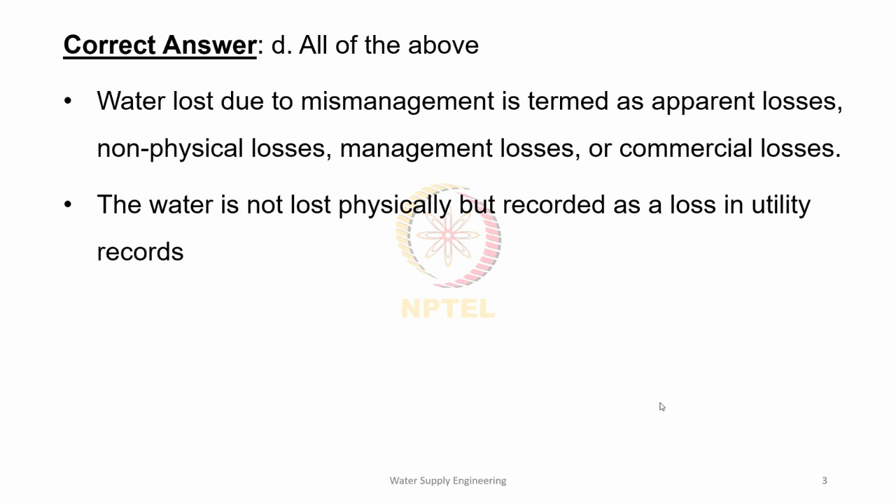Okay, yes. So the answer is all of the above. That is, the water lost due to mismanagement of resources is termed as apparent loss or non physical losses, management loss, or commercial losses. Here, there is no physical loss of water, but that loss is considered as a loss in utility records. It is actually due to mismanagement, but still it is considered as a loss in the utility records. This happens mainly due to recording or data handling errors, sometimes metering inaccuracy, theft of water, or other unauthorized consumption. All these can lead to apparent or non-physical losses.

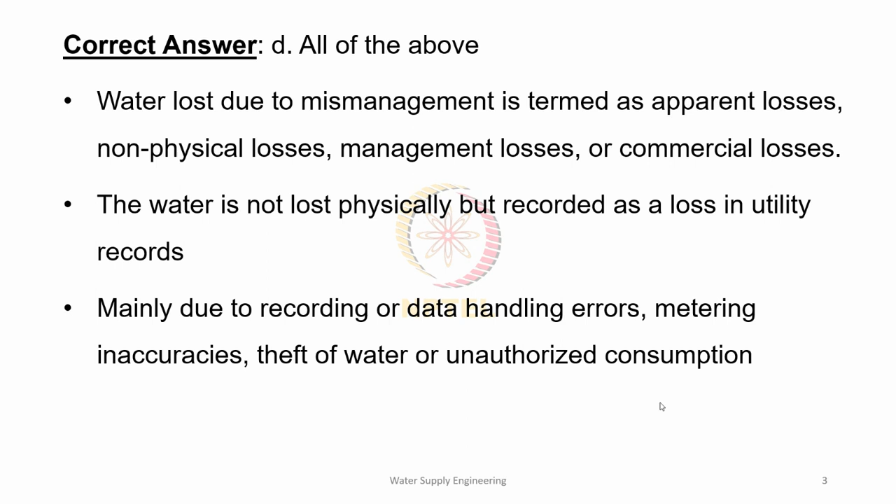Moving on to the next question. Question number two. Seepage through reservoir or tank walls and overflow due to float valve failure are accounted for as option A, real losses or physical losses, option B, management losses, option C, commercial losses, and option D, none of the above. So the seepage through a reservoir or tank walls or overflow due to float valves, which type of losses are these?

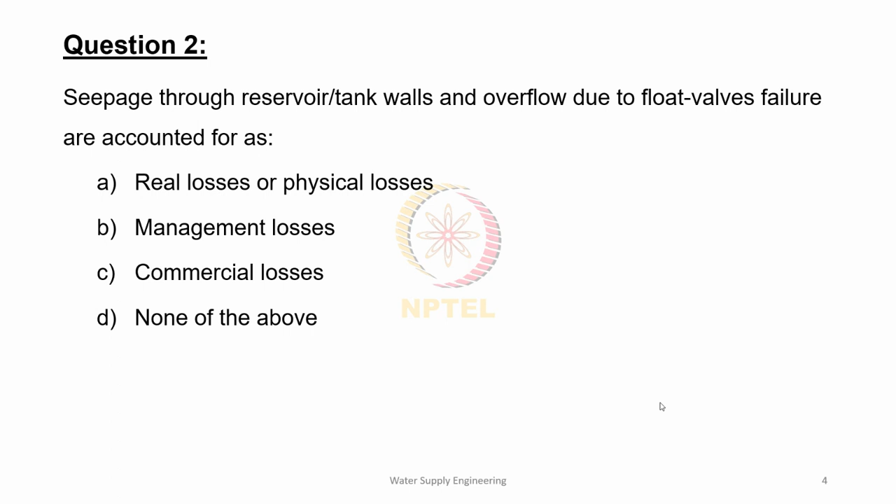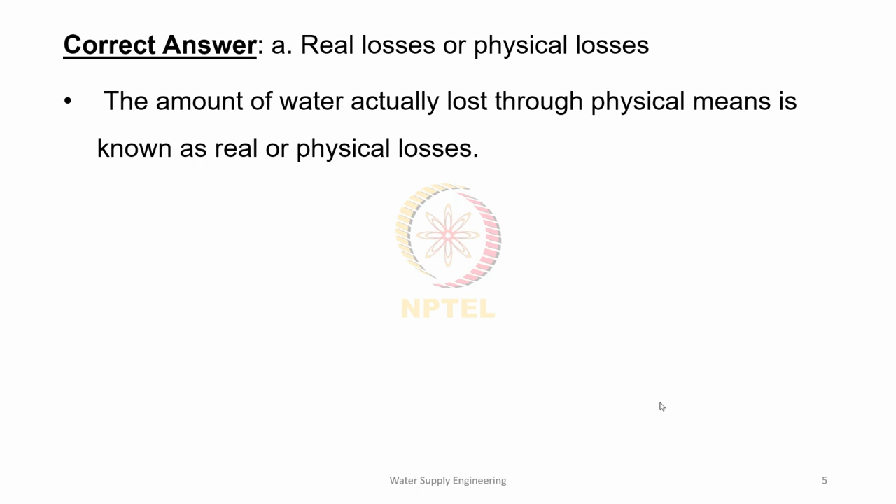Yes, so it's option A, real losses or physical losses. The amount of water that is physically lost is termed as physical loss or real loss. This mainly happens through leakage or overflow. For example, leakage in the pipe, in the joint, fittings, connections, or a seepage loss through the reservoir or tank wall. Also, overflow due to valves. All these contribute to real loss or physical loss of water.

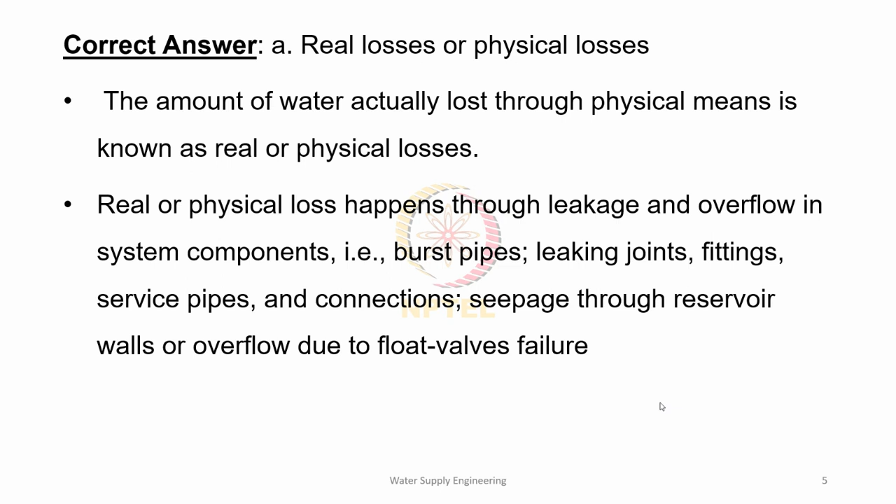So, the major factors that influence the real loss are: first, the percentage of time in a year during which the pipe or system is pressurized. Another factor is, when the system is pressurized, what is the average operating pressure? Third is the total number of connections as well as customer meter or consumer meter locations. Then the number of joints, valves, gauges, and other appurtenances, etc. And the length of the mains, that is the length of the main pipes, and infrastructure condition, basically the type of pipe used and how old that pipe is.

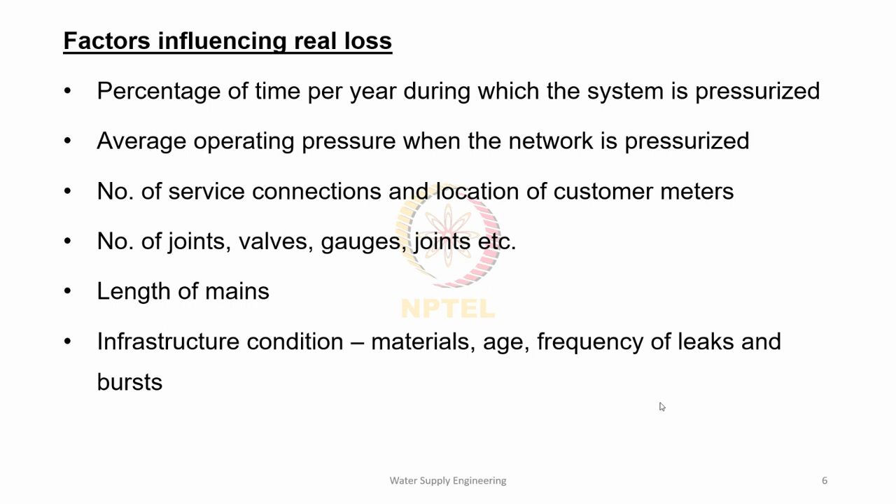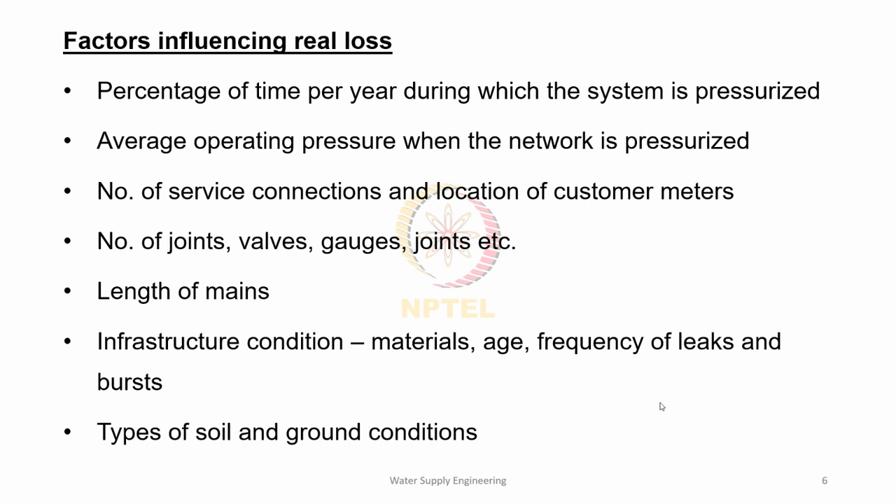Depending upon that, there can be corrosion happening, or deposits along the pipeline. So the age matters, also the frequency of leaks and bursts, and the last factor is the type of soil and ground conditions. All these factors contribute to and influence the real loss.

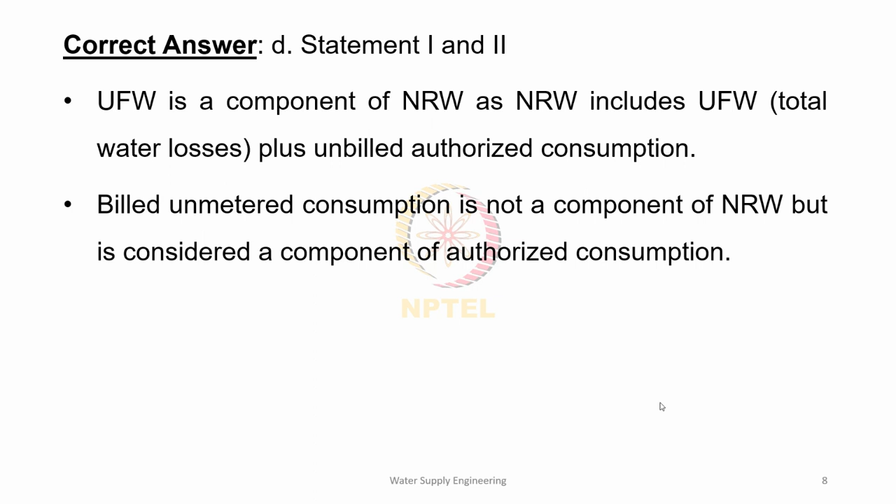Statement 2 is correct. Now, ILI of a utility cannot be estimated from UFW and NRW, but it depends upon pipe length, average operating pressure, as well as the physical losses in the system.

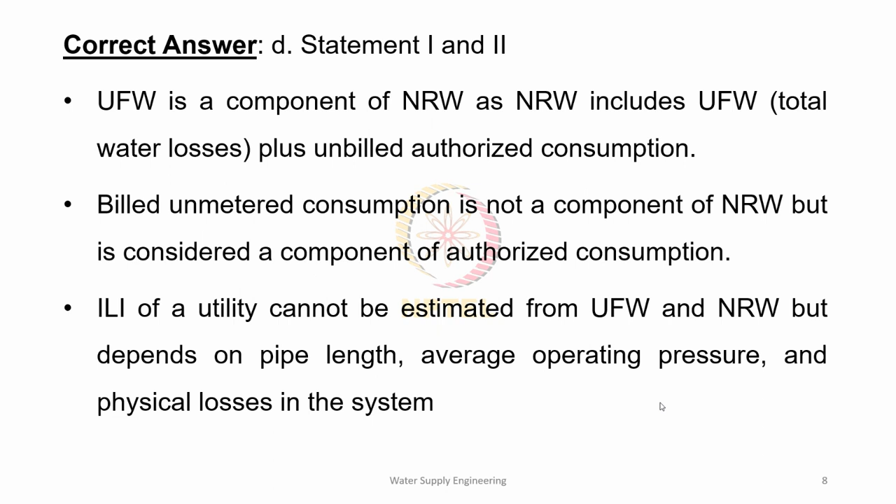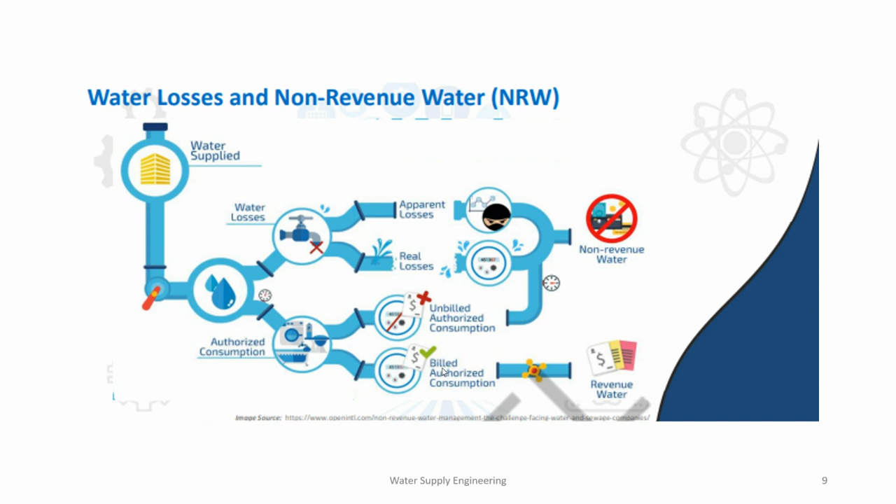So non-revenue water, or NRW, is thus the volume of water for which there is no revenue generation. It can be either the loss or it can be unbilled authorized consumption. So it is the system input volume minus billed authorized consumption that constitutes NRW.

UFW, or unaccounted for water, on the other hand, is the difference between net production and legitimate consumption, whether metered or not. So it's equal to system input volume minus authorized consumption. It's actually an estimate of total water loss. It includes real loss as well as apparent loss, that is physical as well as non-physical losses, included in unaccounted for water.

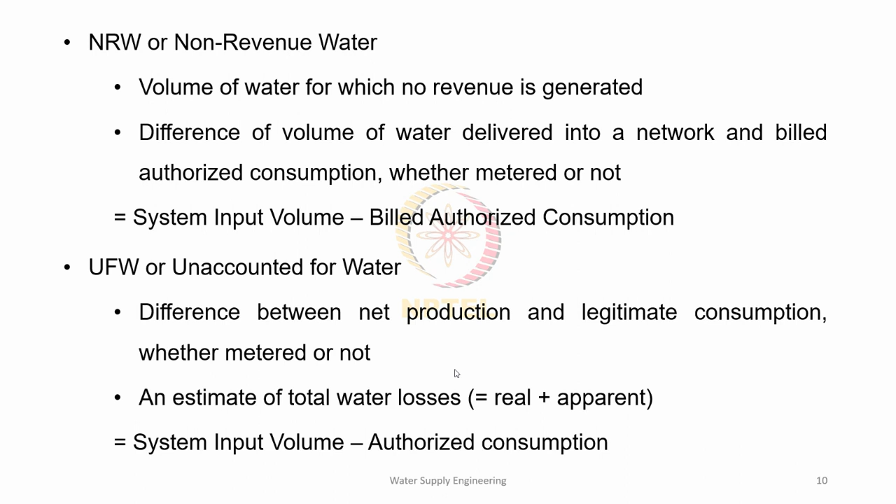So here we can see the water loss indices. UFW is equal to SIV, that is system input volume, minus BAC, billed authorized consumption, minus UAC, that is unbilled authorized consumption. That constitutes real loss plus apparent loss, which together is known as unaccounted for water, UFW.

If we represent this as a percentage, it becomes UFW in percentage is equal to SIV, that is system input volume, minus billed authorized consumption, minus unbilled authorized consumption, the whole divided by system input volume into 100. That is the unaccounted for water expressed in percentage.

Coming to non-revenue water, it is, as we saw, the difference between system input volume and billed authorized consumption. Or it is like the first part from UFW plus UAC. That means it is real loss plus apparent loss plus unbilled authorized consumption. Again, NRW expressed as percentage is given by SIV, that is system input volume, minus billed authorized consumption, the whole divided by system input volume into 100.

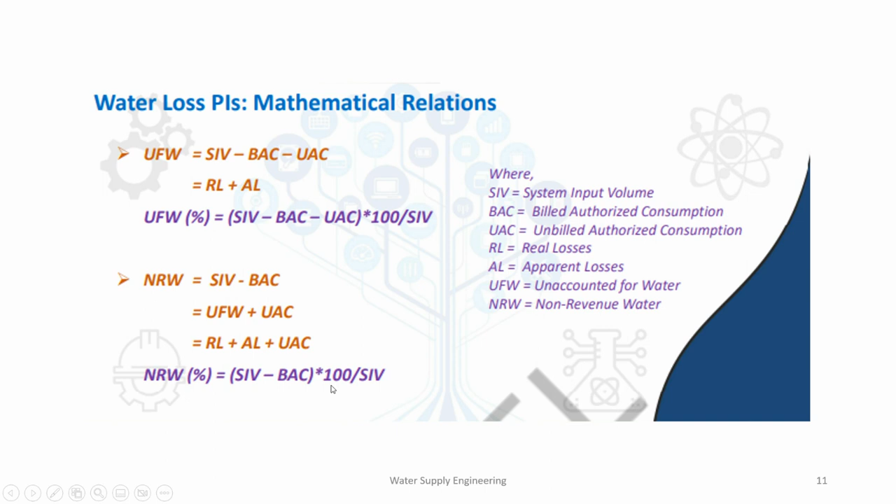Moving on to the next question. The real losses in a water distribution network usually increase with: option A, decrease in the number of consumer or service connections; option B, decrease in the number of joints, valves, and gauges; option C, increase in the average operating pressure of the system; option D, all of the above. So with what does the real loss actually increase?

You can type in your answers in the chat box.

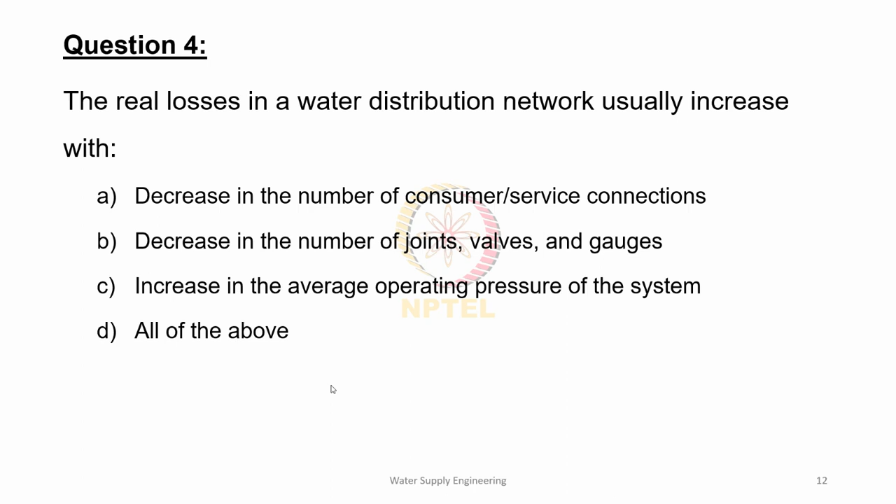Okay, so the correct option is option C, increase in the average operating pressure of the system. The real losses in a water distribution network usually increase with increase in the average operating pressure in the network and the duration for which the network is pressurized. Also, it increases with increase in consumer connections, service connections, as well as with increase in number of joints, valves, and other appurtenances, etc.

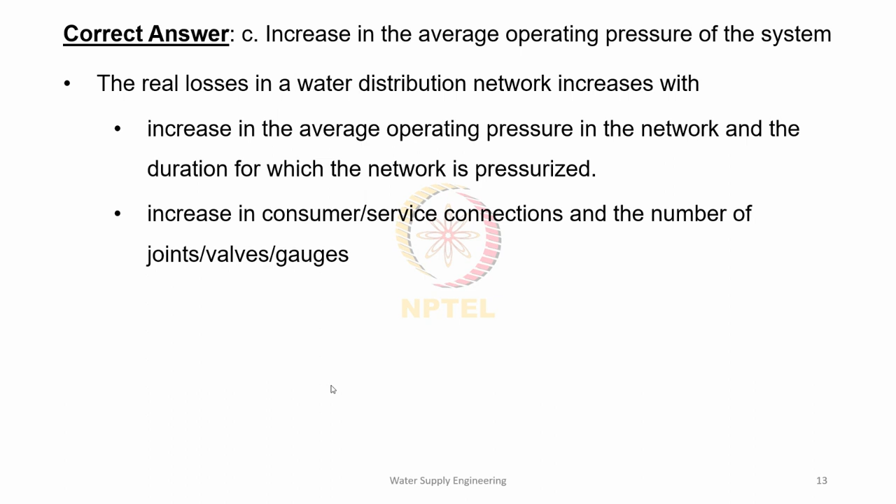Question number 5: unauthorized consumption plus metering and billing inaccuracies in a water distribution network equal to what? Option A, real losses; option B, non-revenue water; option C, unaccounted for water; option D, apparent loss. So just now we saw the definition for all these. So what is unauthorized consumption plus metering and billing inaccuracy?

Is it real loss, non-revenue water, unaccounted for water, or apparent loss?

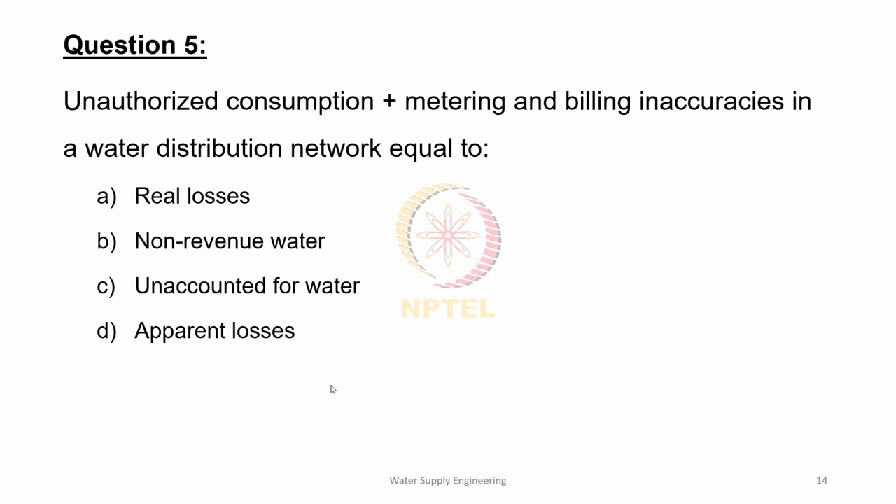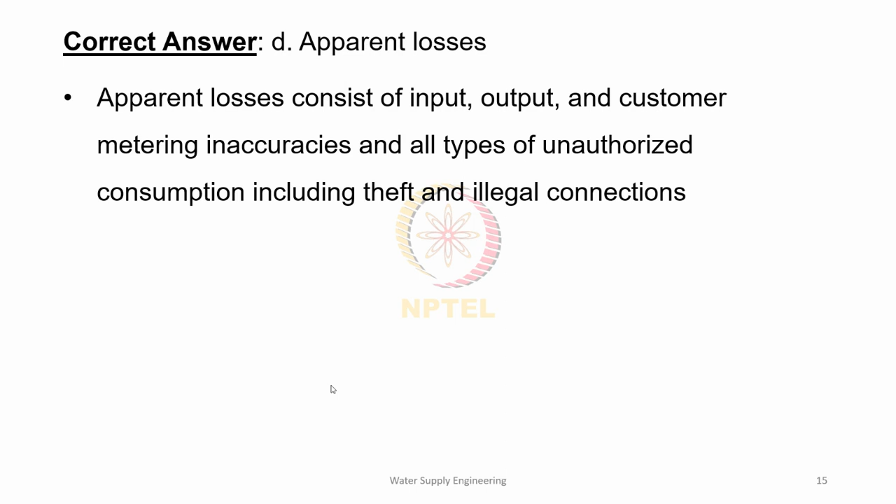Okay, the correct answer is option D, apparent losses. As we saw earlier, apparent losses consist of input, output, and customer metering inaccuracy. All the mismanagement and losses due to mismanagement come under apparent losses, and all types of unauthorized consumption, including theft and illegal connections, come under apparent losses.

So now question number 6: the core component of non-revenue water is option A, unbilled authorized consumption; option B, real losses; option C, apparent losses; option D, all of the above. So which is the core component of non-revenue water?

Okay, so the correct answer is all of the above. That is, non-revenue water is equal to unbilled authorized consumption plus real losses plus apparent losses, as we saw in the earlier slide.

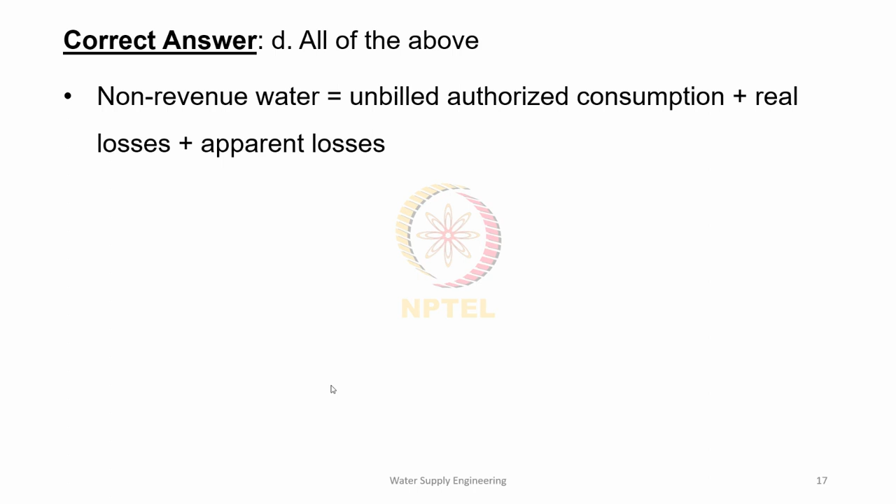Question number 7. Which of these methods can assess the volume of leakage in a water distribution network without pinpointing its location? Option A, ground microphone. Option B, minimum night flow analysis. Option C, tracer gas technique. Option D, none of the above. So, which can assess the leakage without pinpointing the location?

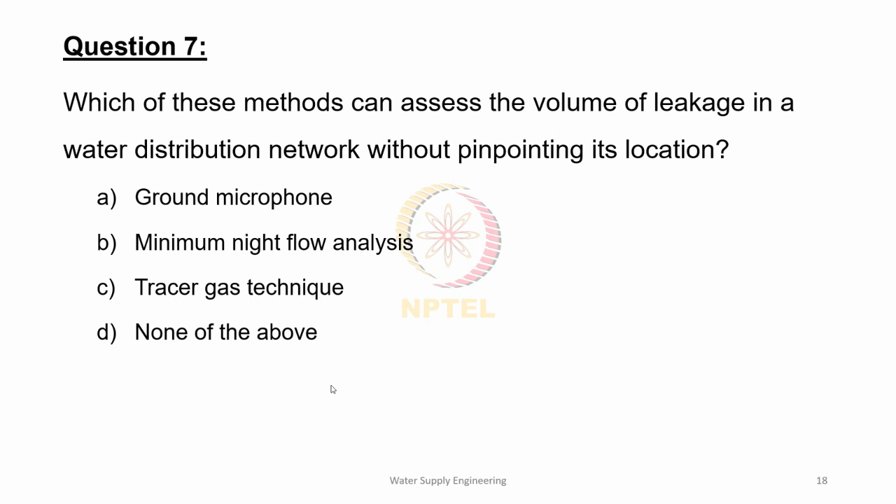Yes, the correct option is option B, minimum night flow analysis. So, minimum night flow is the lowest flow into a DMA over a 24-hour period. Normally, that occurs between 2 to 4 a.m. when most users don't use water. So, this is a minimum flow time, usually in the early morning because most consumers are not using water during that time.

So the water flow during this time is actually considered predominantly leaks, and that helps in estimating real loss. But whatever night flow happens in that time interval is considered as leaks or leakages. We don't know whether it is really a leakage or whether someone is using it. And another problem is that it will not pinpoint the location where the leakage is happening; it just gives an estimation of the value.

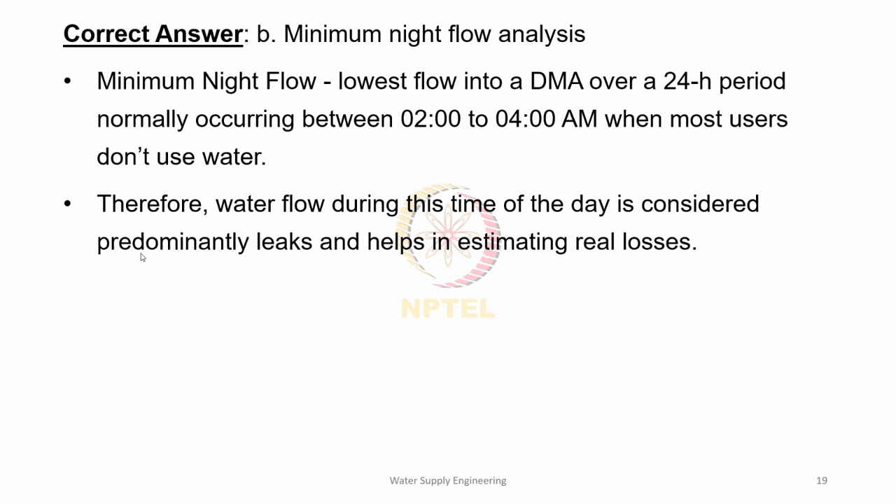So estimation of leakage is equal to minimum night flow minus legitimate night flow. Now what is legitimate night flow? It is roughly calculated as 6% population using 10 liters of water for toilet flush. So that is like some amount of water will be definitely used by some people here or there. To take into account that consumption, estimation of leakage through minimum night flow is done as minimum night flow minus legitimate night flow, assuming that 6% population will roughly use 10 liters of water for toilet flushing.

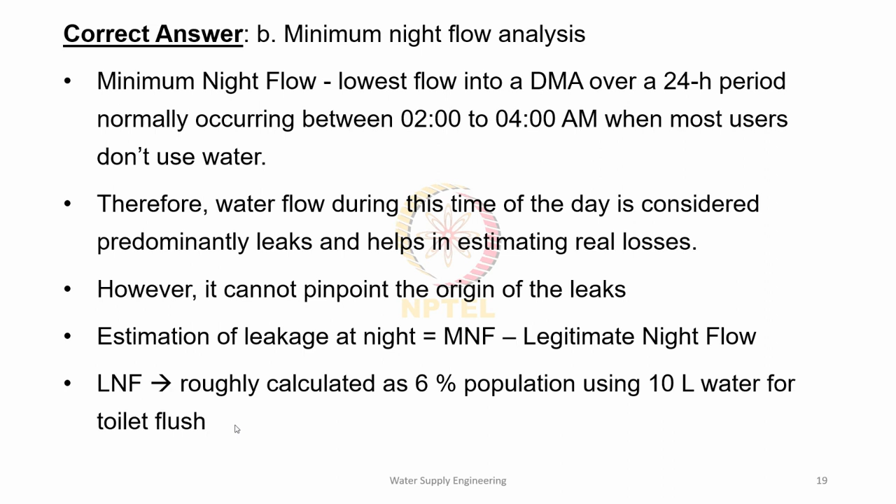Okay, question number 8. Which of the following statements concerning acoustic methods of leak detection is or are true? Option A, the efficacy of leak noise loggers in pinpointing exact leak locations can be increased by using them in combination with correlators. Option B, the leak noise correlator pinpoints the leak location using only the distance between the two sensors. Option C, both A and B. Option D, none of the above. So, which statement is true?

So, it's option A, B, or both A and B, or none of them.

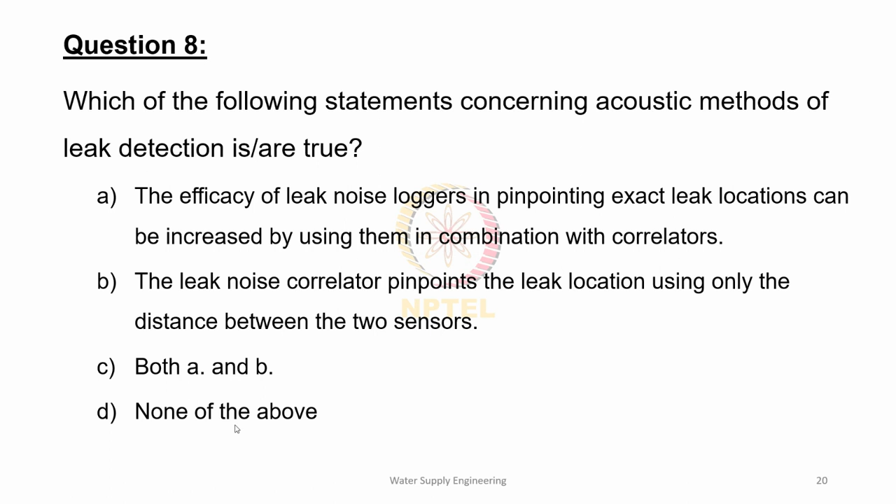Okay, so the correct answer is option A. That is, the efficacy of leak noise loggers in pinpointing exact leak locations can be increased by using them in combination with correlators. So that's a true statement. Leak noise loggers can identify leaks immediately as they occur but do not identify the exact location without the use of a correlator. Only if we use them combined with a correlator can we get an exact location pinpointed.

So the leak location from the sensor is given as d minus c delta t by 2, where d is the distance between sensors, c is the propagation velocity of sound, and delta t is the time lag corresponding to difference in arrival times of leak signals.

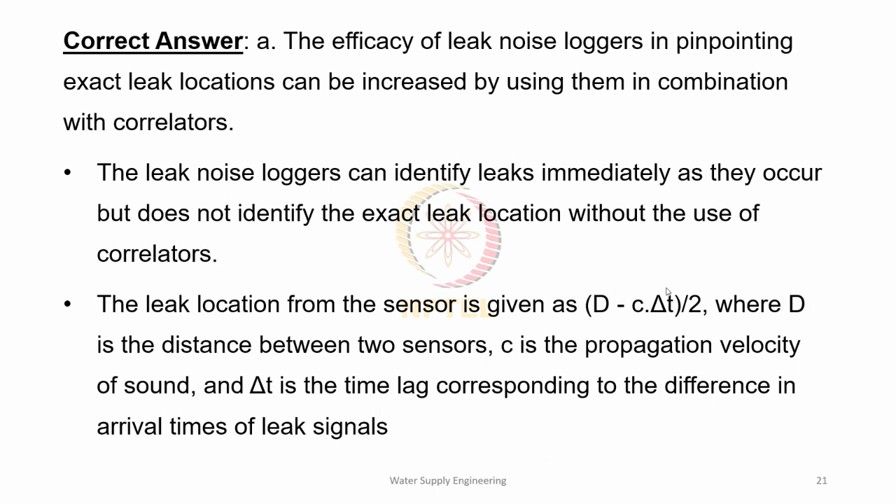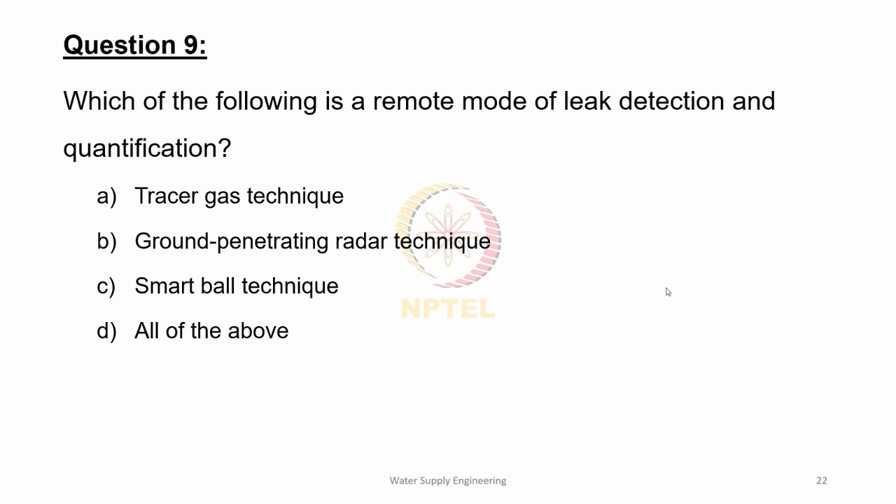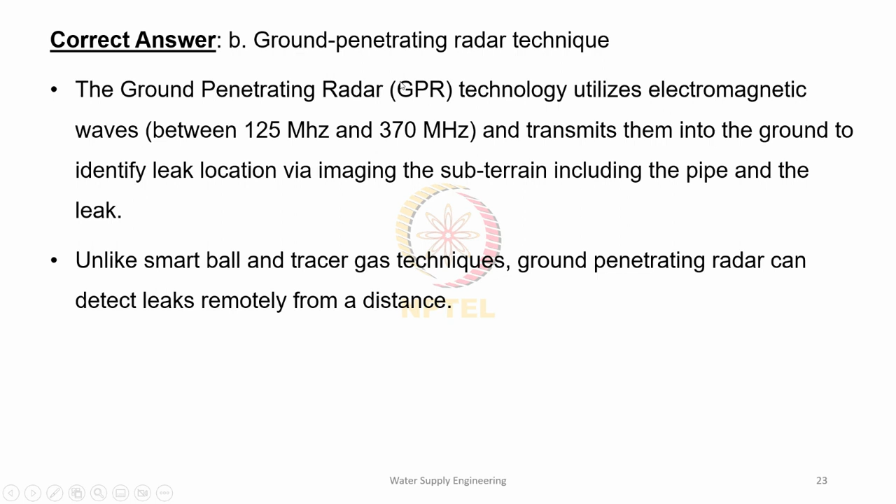Yes, correct answer is option B, ground penetrating radar technique. The ground penetrating radar technology, or GPR technology, utilizes electromagnetic waves that lie between 125 and 370 megahertz. They transmit these electromagnetic waves into the ground to identify the leak location using imaging of the subterranean, including the pipe and leak. So it's a remote method. Unlike options A and C, where the smart ball and tracer gas techniques are used, ground penetrating radar can operate remotely from a distance.

So, we'll see what are the details of water loss detection. Leakage or loss detection is actually a critical parameter when we come to water distribution networks, because if there is more unauthorized consumption, more theft of water, or leakages happening, it results in a huge loss of water, or a good percentage of water from the supplied water. And if leakages happen, it can cause problems in the normal distribution of water, as well as water logging issues wherever the leakage is happening. So leak detection is a critical parameter.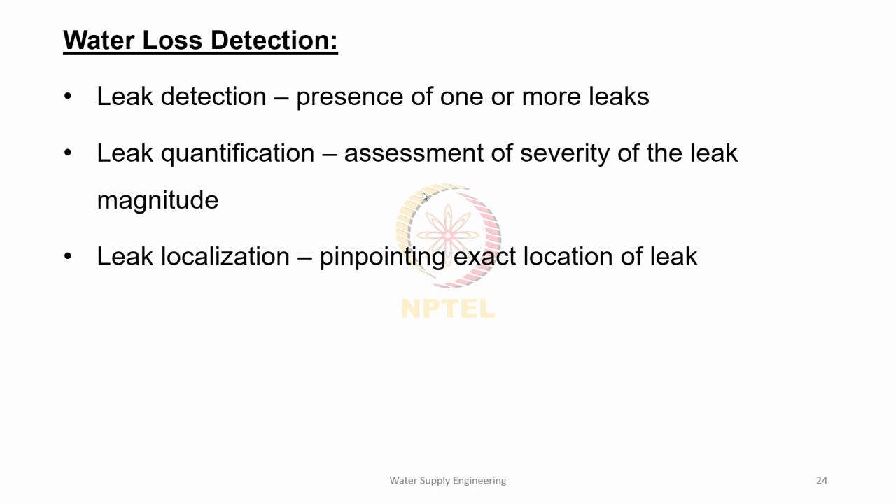So the process is like, first we need to detect the leak, then we need to quantify it, and then we need to pinpoint the location. That is leak detection, leak quantification, and leak localization. In leak detection, the presence of one or more leaks is identified. In leak quantification, the severity and magnitude are assessed. And in leak localization, the exact location of the leak is identified. So the process is first detect, then quantify, and then localize.

So these are the different leak detection methods according to Zaman et al. that are available now. There are direct methods as well as indirect methods. In direct methods, we have hardware based methods, visual inspection, and pipe sampling. In the hardware based methods, it's like robotic devices or out-of-pipe devices. These are new technologies that have come in. The most obsolete method among direct, indirect, and inferential methods is the inferential method, where we do soil monitoring, soil LPR, or pipe-soil potential surveys.

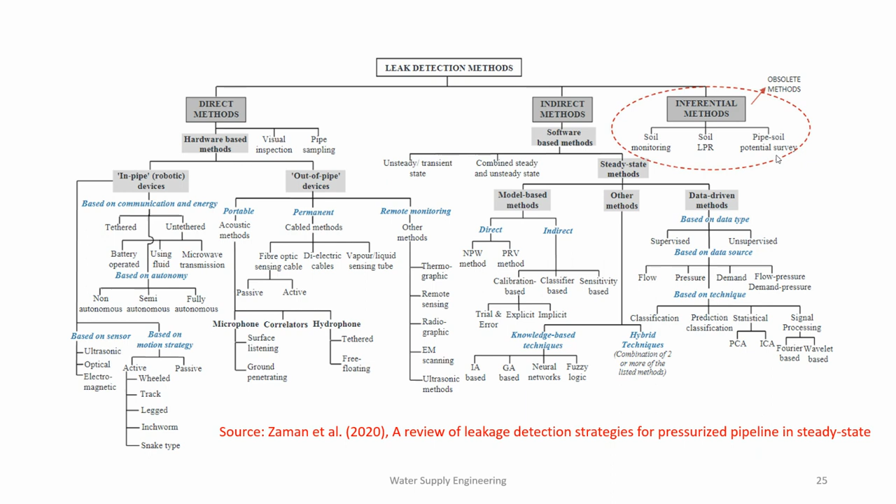So we'll see some of these methods in detail. The first one is minimum night flow analysis that we saw earlier. As we saw, it is the lowest flow happening over a 24-hour period, during 2 a.m. to 4 a.m. The assumption is that during that time period the flow is mostly due to leakages, and if some consumption is happening, that is considered legitimate night flow, which is subtracted from minimum night flow to obtain the leakage value. That is, real loss is equal to minimum night flow minus legitimate night flow.

So the estimation through this method is usually not valid because it usually overestimates for the daytime, as the average operating pressure during day is less. According to Lambert, the pressure-leak relationship is expressed as L1 by L0 is equal to P1 by P0 raised to N, where L represents leakage, P represents pressure, and N represents the leakage component or leakage exponent that varies from 0.5 to 1.5. For a connection with fixed area leakage path, N is 0.5. If the leakage path is variable, we should take N as 1.5.

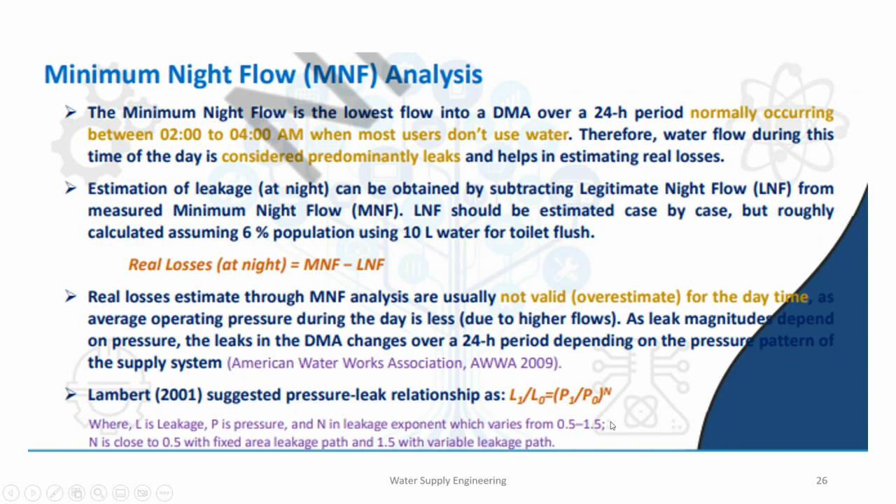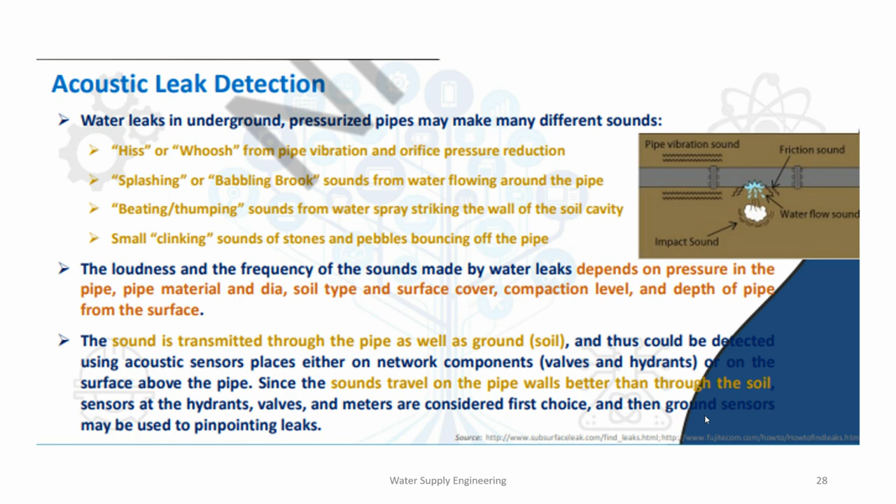So this is what happens there. This can be done either in contact mode or survey mode or both. On fittings, we can do contact mode; between fittings, we can go for survey mode. So with the deflection in the meter, whether it is weak or loud noise that is coming, we will detect the location and leakage quantities.

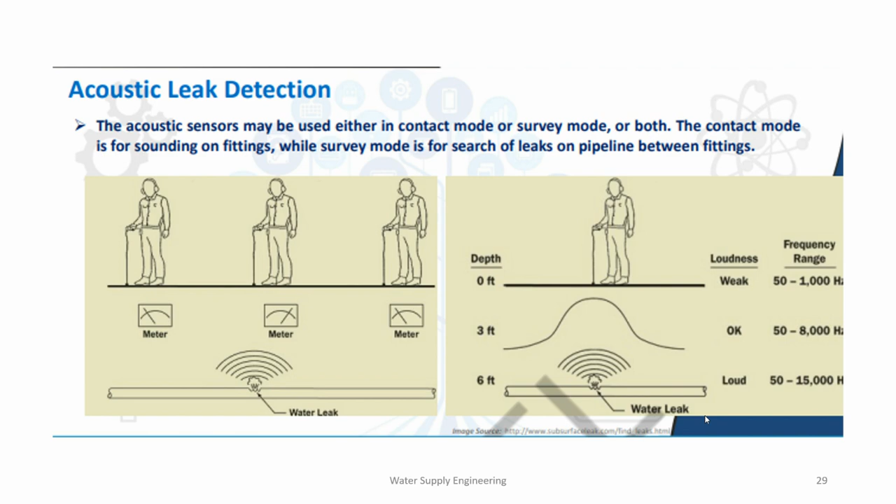The next one is leak noise loggers, that is a microphone plus a logger. That is installed on a group of adjacent fittings. This will be a semi-permanent or permanent monitoring system. They will identify one or more of the fittings, considering the characteristics between similar fittings, and then search on the unique features coming out due to the leakages. But the problem is, again, this cannot pinpoint the location where it has happened, and it has a high initial cost also, because this real-time monitoring system is a bit costly.

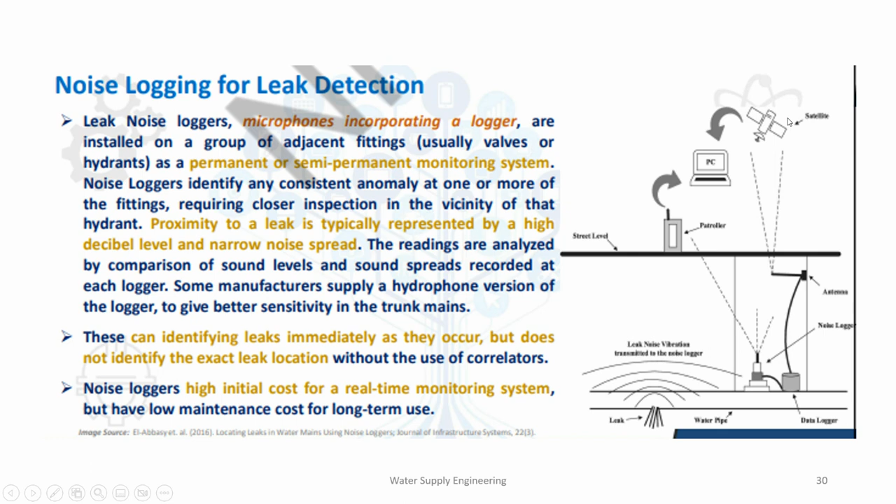The next one is sounding surveys. This is like listening devices are used in order to analyze the sound that is being generated in the appurtenances along the pipe network. These are highly accurate and sensitive. These are carried out using various types of equipment, for example acoustic listening stick, electronic listening stick, ground microphone, leak noise correlators. All these are used for sounding surveys.

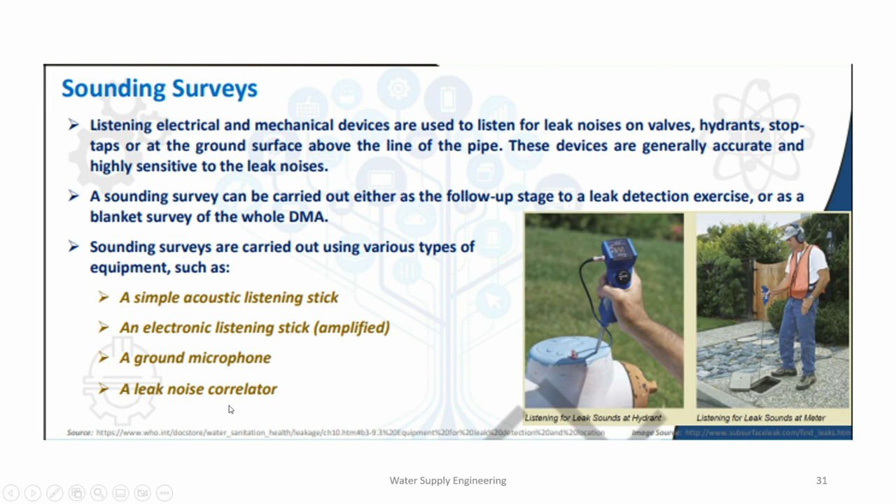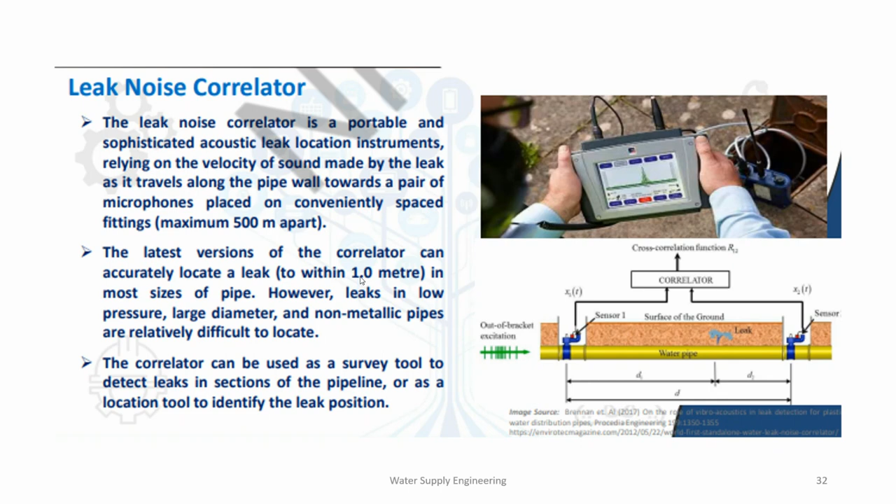Another method is leak positioning. If we have to identify the exact position, the time lag is to be calculated, and that is given by the difference between the arrival times in measured signals. The time lag, as we saw earlier, is L2 minus L1 by C. So from this equation we saw that leak location is equal to D minus C delta T by 2. This will give the leak location or leak positioning, this distance being from the sensor to the leakage point.

The next method is tracer gas injection for leak detection. Here what we do is inject a tracer gas which is inert, non-toxic, and insoluble. We introduce this into the pipe network, for example using a hydrant, and the gas, since it is lighter, will try to escape through the leaks as shown in the picture. This leakage of gas is detected using microsensors, and this is usually used for all types of materials. It can be used for all types of materials, but is usually not used just because of the additional high cost that comes with it. So we do not recommend it for larger pipelines, and the major application is to identify small background leaks or leaks in service pipes, etc.

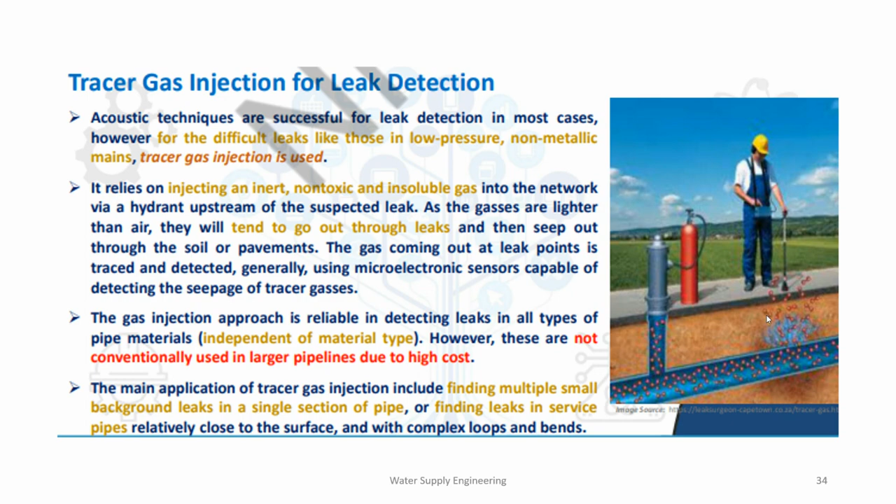Some other methods are infrared thermography, ground penetrating radar, leak detecting robots, wireless micro electromechanical devices, and data sensing and analysis based software, etc. Ground penetrating radar we saw earlier, it is a remote method. Infrared thermography uses infrared or IR images capturing the emitted infrared radiation and then detecting thermal contrast that occurs due to water leak. These days we have leak detecting robots as well, for example smart ball, where they do pipe inspection and leak location. Also we can have micro electromechanical devices where we have micro sensors and actuators for leak detection and repair, and there are various software and artificial intelligence based technologies that are getting developed these days.

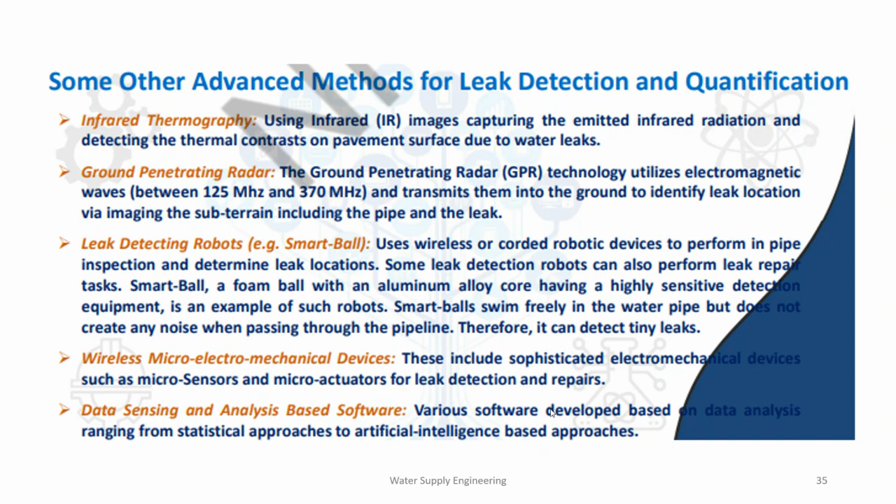All right, moving on to the next question. An urban water utility pumps an average of 600 million liters per day of treated water into its water distribution network. The utility records an authorized consumption of 525 million liters per day through its bulk meters, but collects revenue from the billed metered connections only for 475 MLD.

Determine the approximate values of NRW and UFW in percentage of the utility per day respectively. Option A: NRW equals UFW equals 13 percent. Option B: NRW equals UFW equals 21 percent. Option C: NRW equals 13 percent, UFW equals 21 percent. Option D: NRW equals 21 percent, UFW equals 13 percent. So please calculate and put the answer in the chat box.

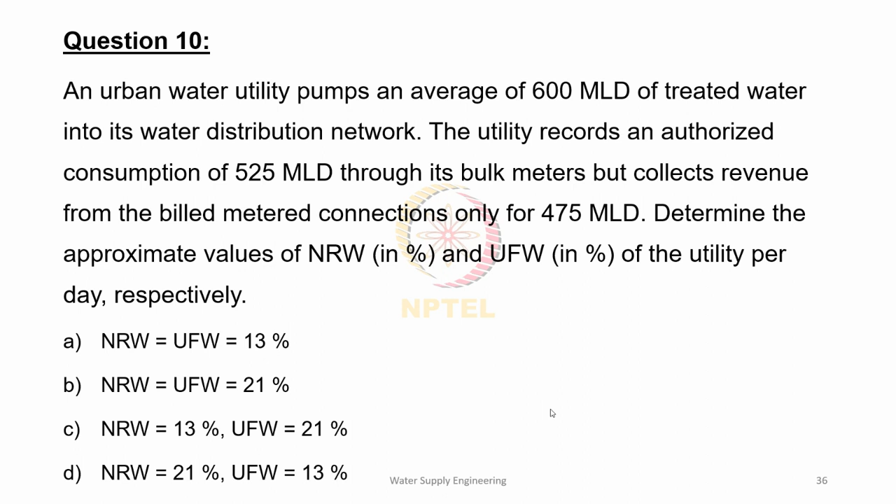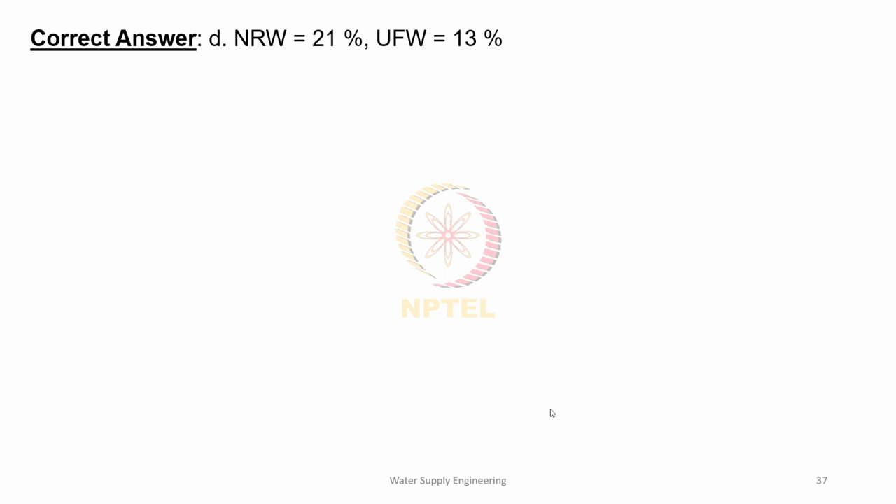Okay, so the correct answer is option D: NRW is equal to 21 percentage and UFW is equal to 13 percentage. We are given the average treated water pumped, that is 600 million liters per day, and authorized consumption recorded as 525 million liters per day. So the consumption for which revenue is collected is 475 million liters per day. So we need to determine NRW and UFW.

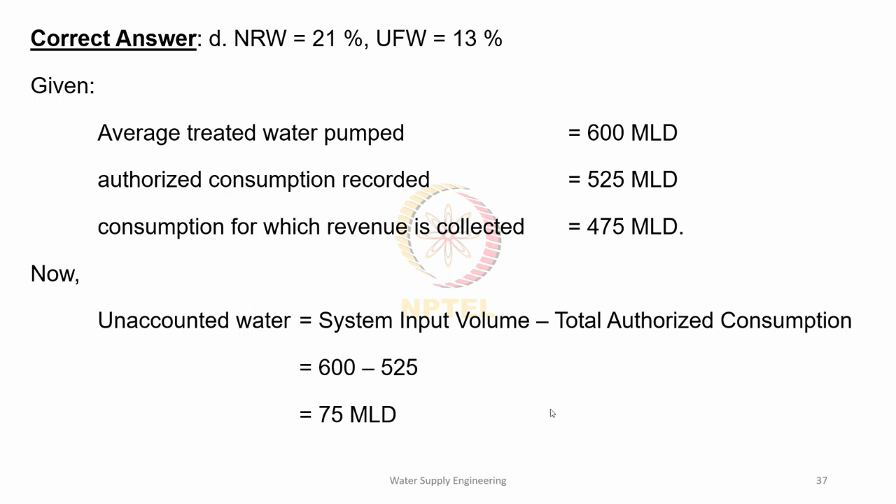We know that unaccounted for water, as we saw earlier, the equation is system input volume minus total authorized consumption. That is 600 minus 525, which is equal to 75 million liters per day. Now we need this in percentage, so dividing it by system input volume and multiplying by 100, UFW is approximately equal to 13 percentage.

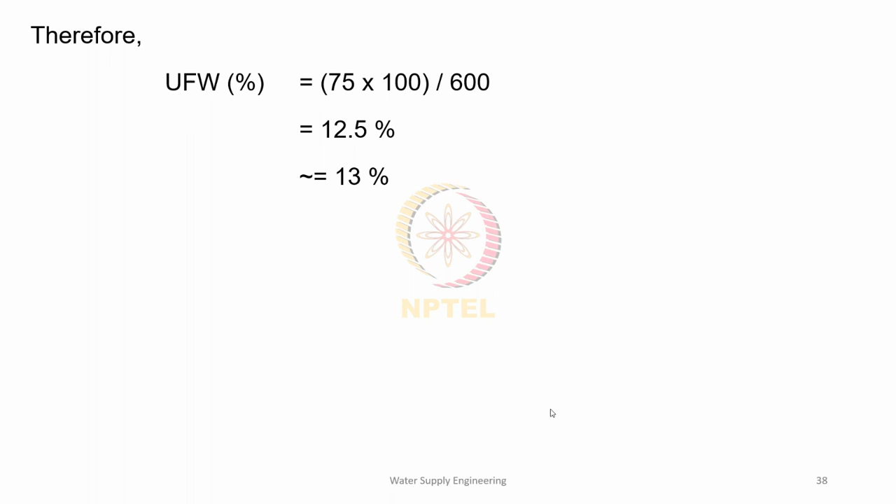Now coming to NRW, it is equal to system input volume minus billed authorized consumption, so that we get the unbilled consumption. NRW is equal to 600 minus 475, that is 125 million liters per day. Taking it into percentage, dividing by system input volume, NRW in percentage is equal to 21 percentage approximately. I hope that is clear.

So we have the next question, it's a numerical problem. The leak flow rate in the water transmission line under 3 bar pressure is estimated to be around 12 meter cube per hour. Determine the leak flow rate in meter cube per hour in the transmission line if the pressure is increased to 4.5 bar pressure, assuming a fixed area leakage path and using the leak pressure relationship proposed by Lambert. We saw that equation earlier. Please solve the problem using that and type in the value in the chat box.

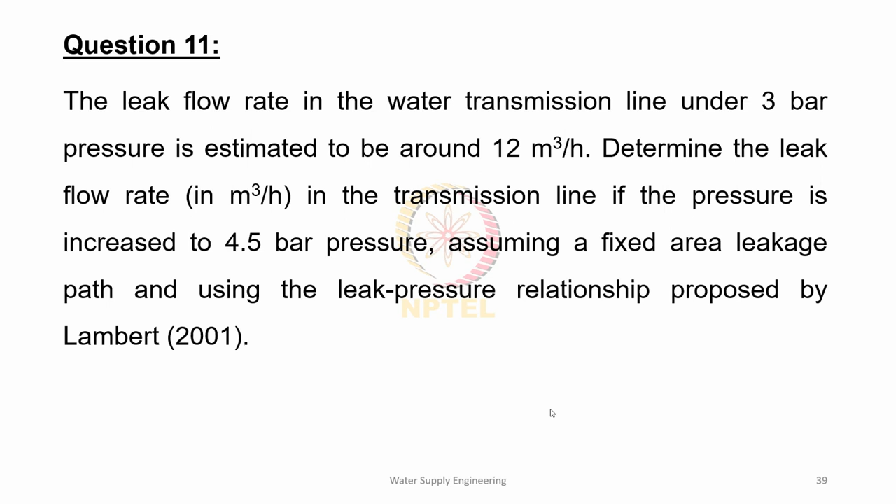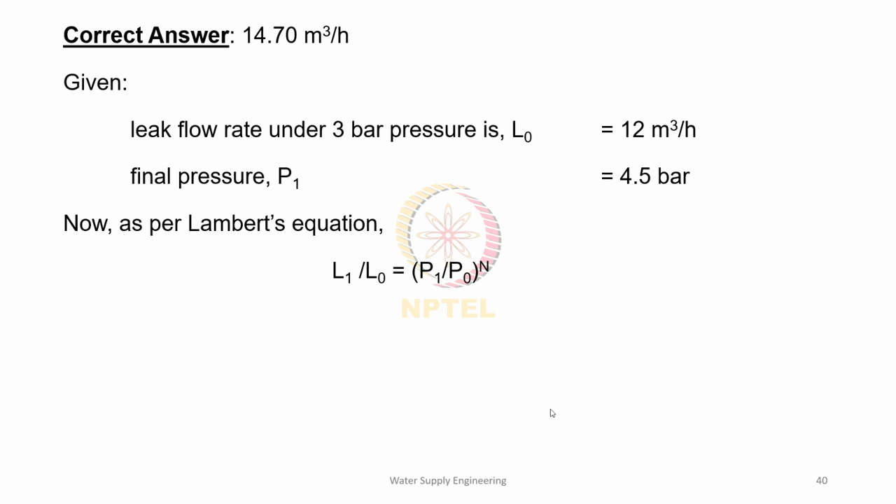So it's direct substitution in the equation given by Lambert. Okay, I have got two values, two numbers. We'll see, correct answer is 14.7 meter cube per hour. We are given that the leak flow rate under 3 bar pressure is 12 meter cube per hour and the final pressure is 4.5 bar. So according to the equation we have L1 by L0 is equal to P1 by P0, the whole raised to n. L0, P0 is given, P1 is also given, L1 is unknown.

As we saw earlier, n lies between 0.5 to 1.5. If it is a fixed leakage path, it is 0.5, and for variable it is 1.5. So here it is 0.5. Substituting the values, we have L1 is equal to 14.7 meter cube per hour.

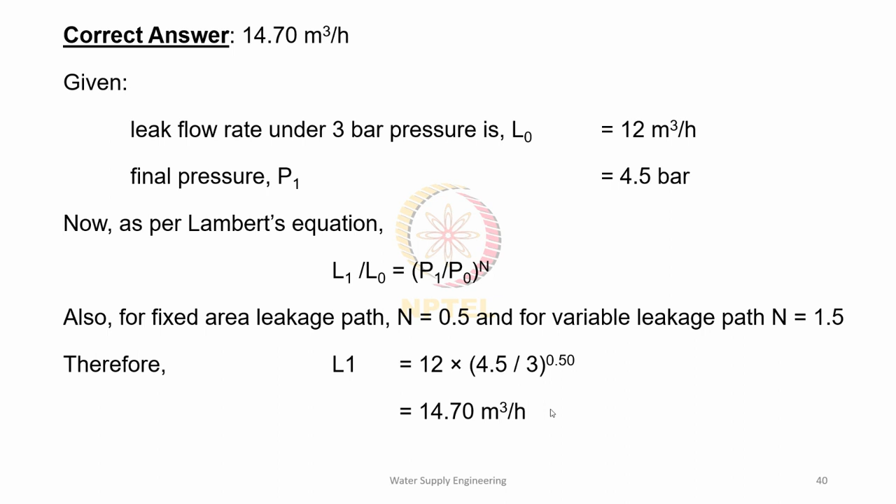So the next question: the apparent loss estimated from a faulty bulk meter in the water supply in a residential complex is 15 kiloliter per day. Determine the inaccurate reading of the faulty bulk meter corresponding to the actual water flow of 1 kiloliter if it records 4500 kiloliters of cumulative monthly flow. So try to solve this.

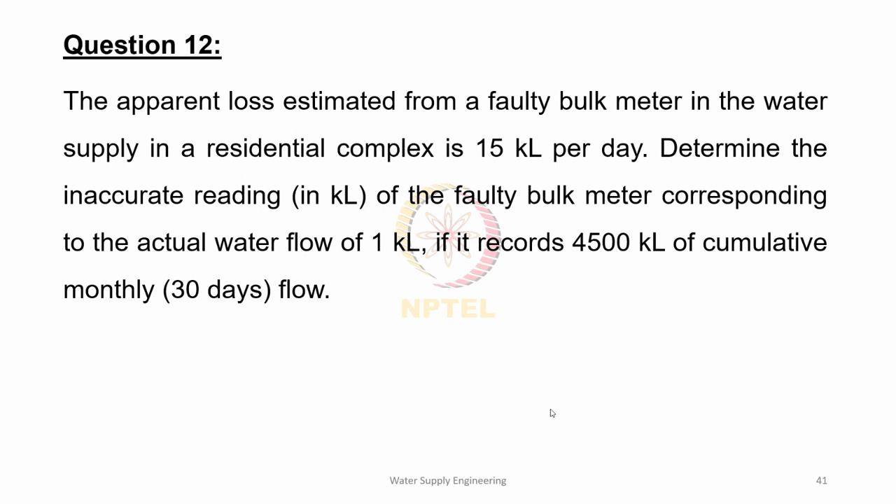Okay, so we'll see how to solve the problem. The correct answer is 0.91 kiloliters. We are given that the apparent loss estimated from the faulty bulk meter is 15 kiloliter per day and actual flow is 1 kiloliter. Cumulative monthly flow recorded is 4500 kiloliters. So the apparent loss per month will be 15 into 30, for 30 days as they have told to calculate, that is 450 kiloliters.

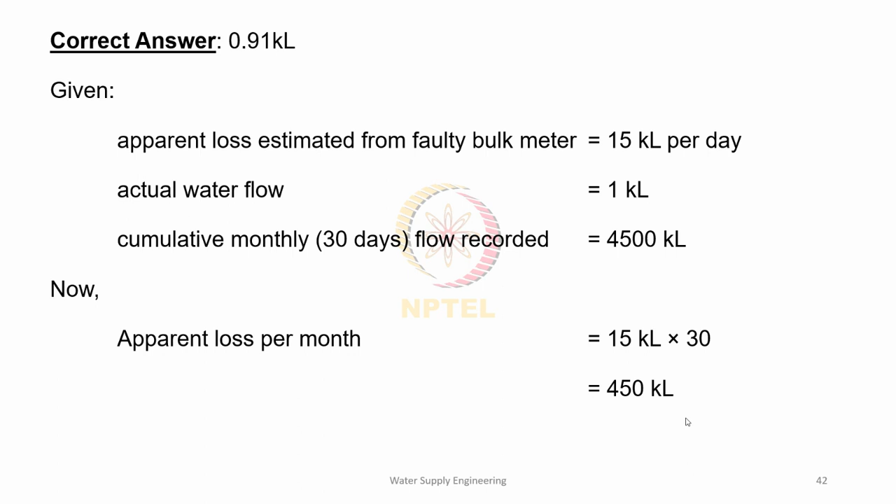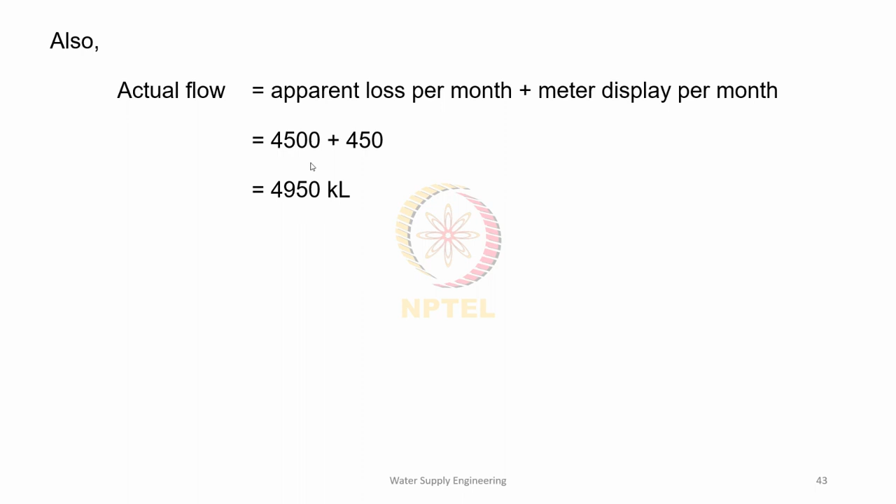So actual flow is apparent loss plus meter display, that is 450 plus 4500, which means 4950 kiloliters. So this 4950 actual flow is read as 4500 in the faulty bulk meter. So 1 kiloliter will be read as 4500 by 4950, which is 0.91 kiloliters. Hope that is clear.

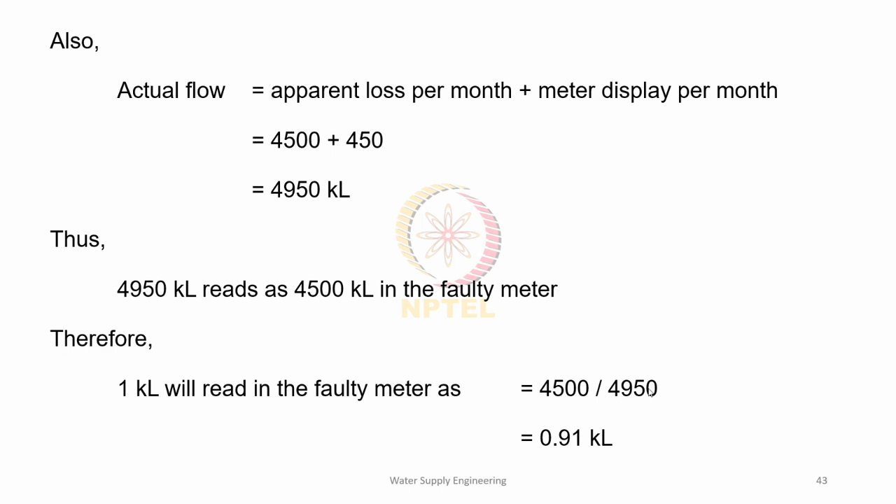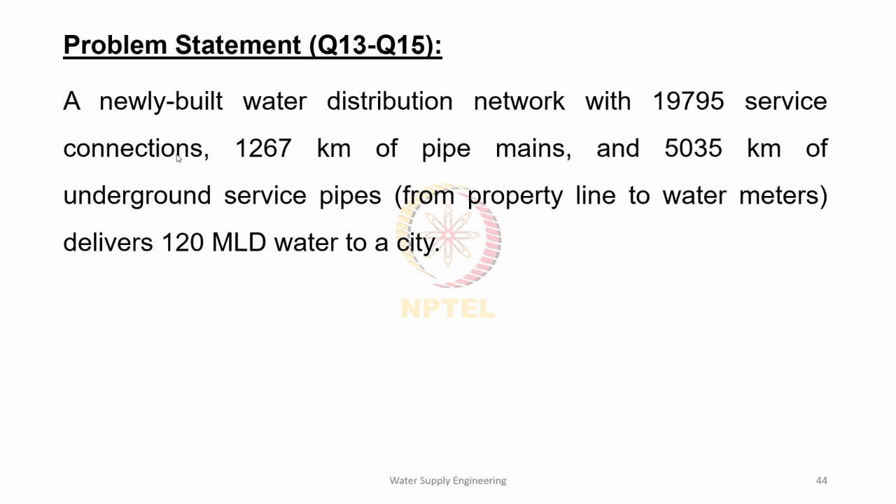Please note down the value so that you can do the calculation. I'll give you 1 or 2 minutes maybe. Okay, I hope you have noted the values down. So this is the question, please try to solve it.

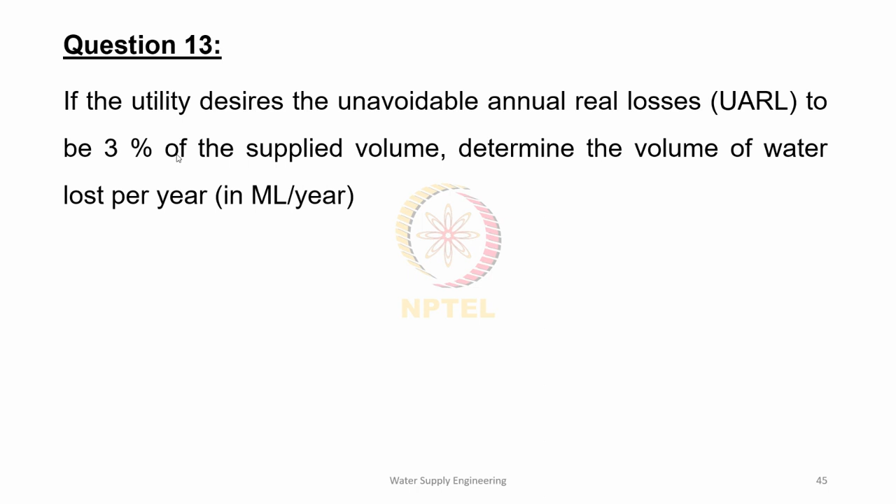Okay, so I've got two answers. That is correct, yes, 1314 million liters per year. We are given the number of service connections, length of pipe mains, length of underground service pipes, and amount of water being delivered. So it's given that UARL is to be considered as 3 percentage, that is 3 by 100 into 120, the total water delivered over the year. So 0.03 into 120 into 365, which gives 1314 million liters per year.

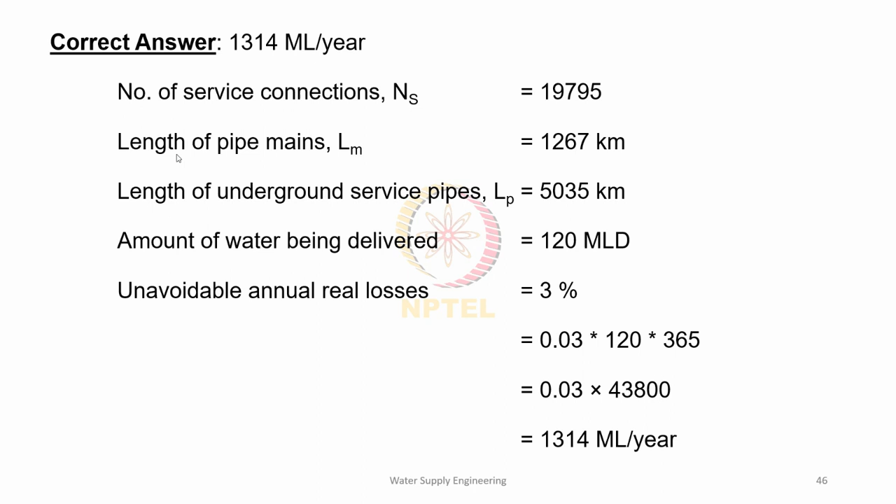So coming to the second question: determine the average pressure required to be maintained in the distribution network to ensure a UARL of 3 percentage of the supply volume. If we have to ensure that this UARL will be 3 percentage, what is the average pressure to be maintained? All the other data remains the same. Here we need to determine the average pressure required. Please try to solve it.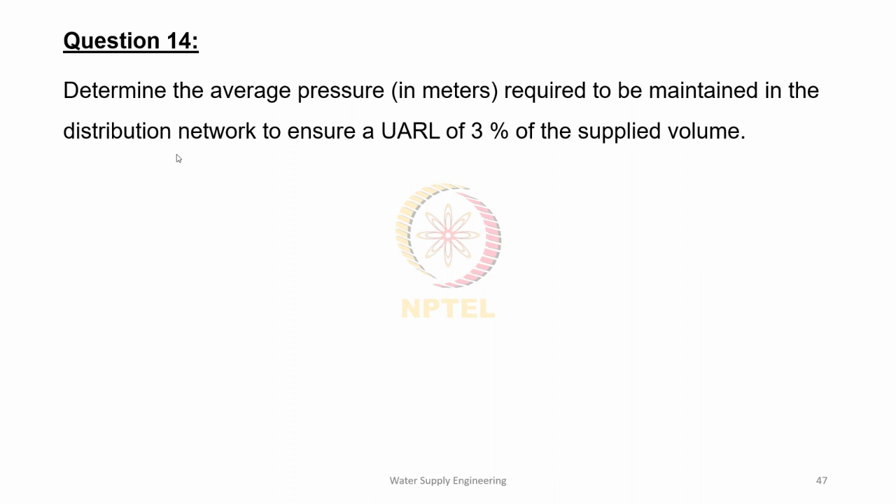Okay, so we'll see how to solve this. The correct answer is 21.9. The number of service connections, length of pipe mains, length of underground service pipes, and amount of water delivered, all these values were given in the earlier question itself, and UARL we had calculated as 1,314 million liters per year. That is converted into meter cube per year here. Now, in order to maintain this UARL as 3 percentage, the pressure required is obtained from this equation: UARL equals 6.57 Lm plus 0.292 Ns plus 9.132 Lp, the whole into P. So here all the other values except the pressure are known, and by resubstituting for P, we have P equal to 21.9 meters.

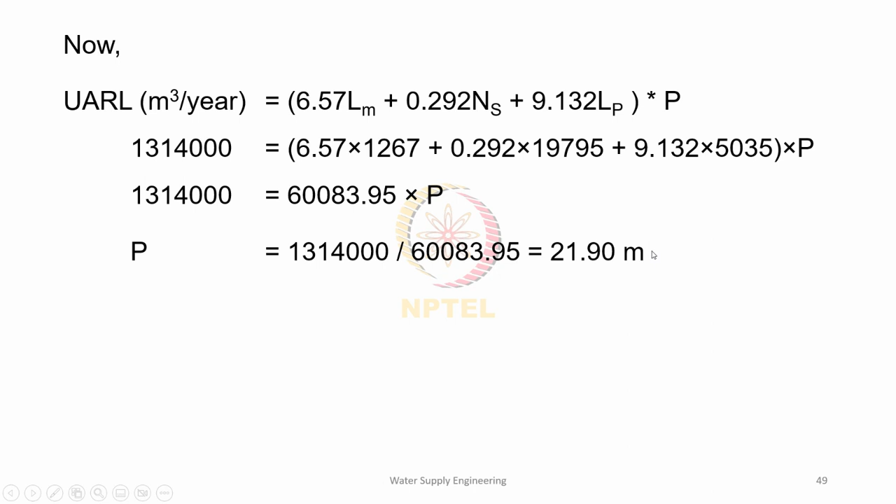Now question 15. If the real loss from the system after 1 year of operation is estimated as 2076 million liters per year, determine the ILI of the distribution network. All the other data remains the same as in the previous question. Please try to solve this.

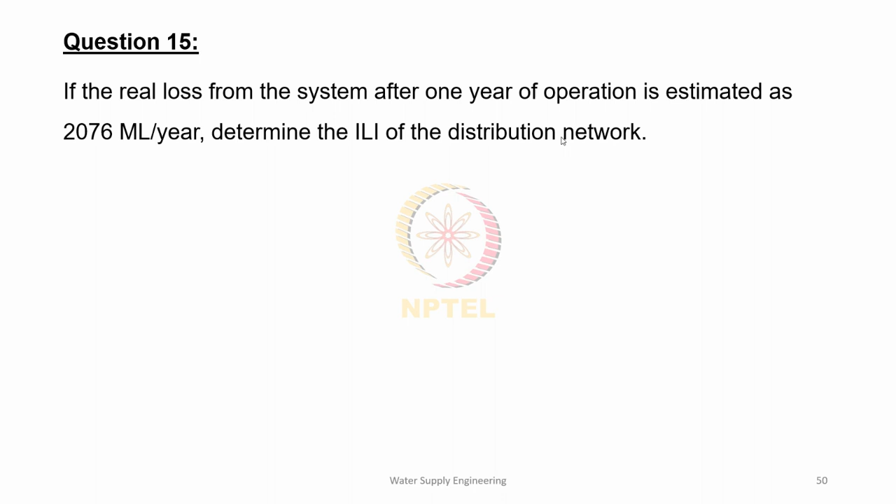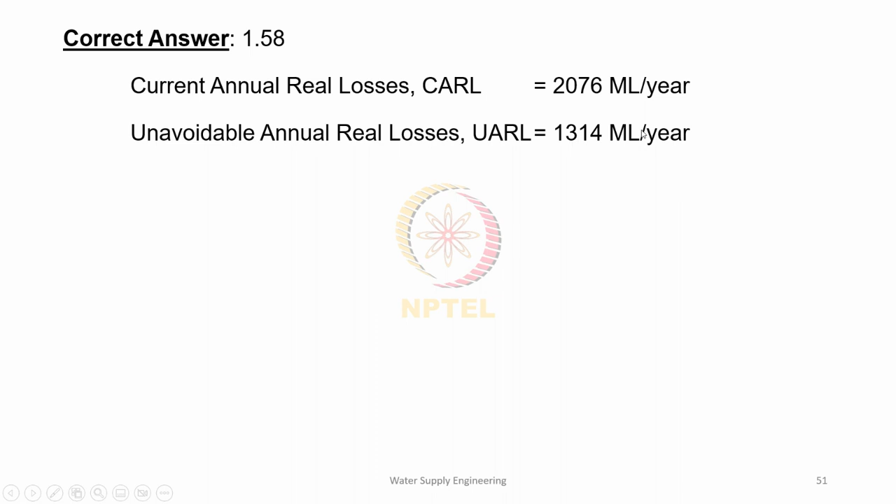Okay, so we'll see how to solve this. Yes, the correct answer is 1.58. We are given that the current annual real loss, CARL, is 2076 million liters per year, and the unavoidable annual real loss we have calculated already as 1314 million liters per year. Now, infrastructure leakage index or ILI is given by CARL divided by UARL. That is, ILI equals 2076 by 1314, which is 1.58.

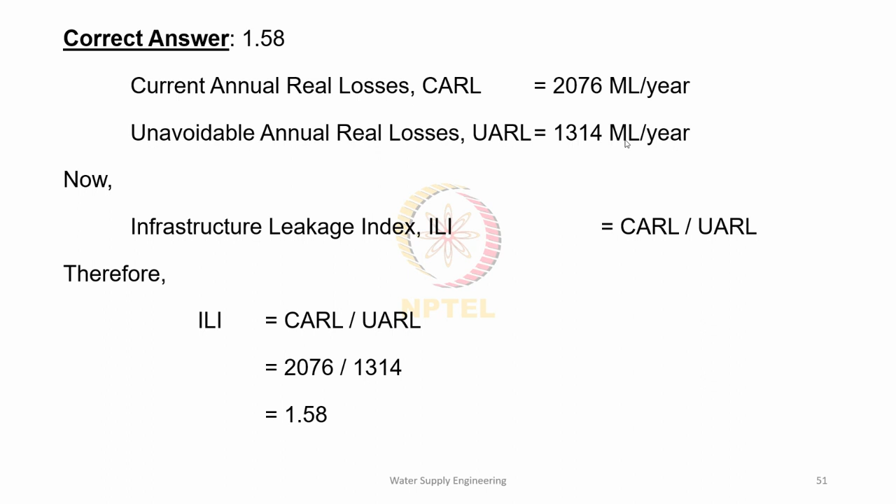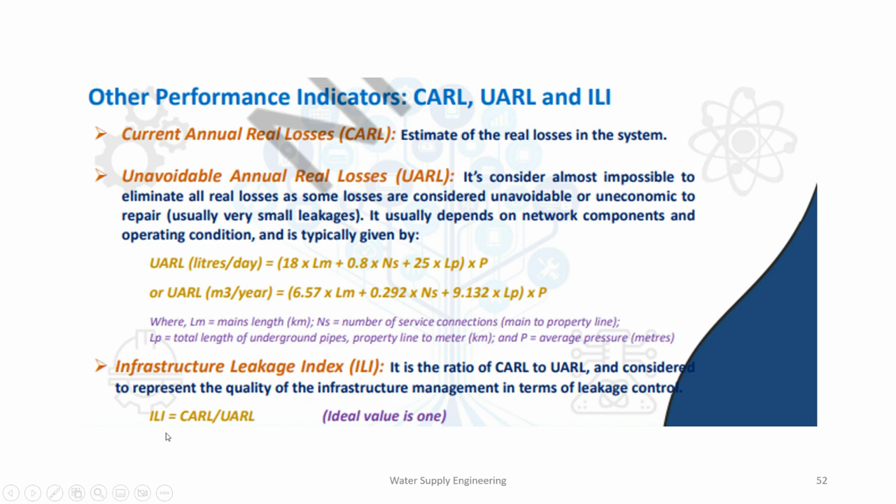So the current annual real loss is nothing but the real loss estimation, and unavoidable annual real loss is the amount that is almost impossible to eliminate, somehow it is always unavoidable. That is given by a particular equation, and the infrastructure leakage index is then the ratio of these two, CARL and UARL. So the ideal value of ILI will always be 1.

Now coming to the last question, the 16th question. Last time we had missed one question because of a missing parameter, so here we have another similar question. Determine the equivalent diameter in mm of a 900-meter long equivalent new pipe for a piping system consisting of three pipes connected in series. The length of the individual pipes is 200 meter, 300 meter, and 400 meter respectively, and their individual diameters are 200 mm, 150 mm, and 250 mm respectively. Please try to solve this question, determine the equivalent diameter.

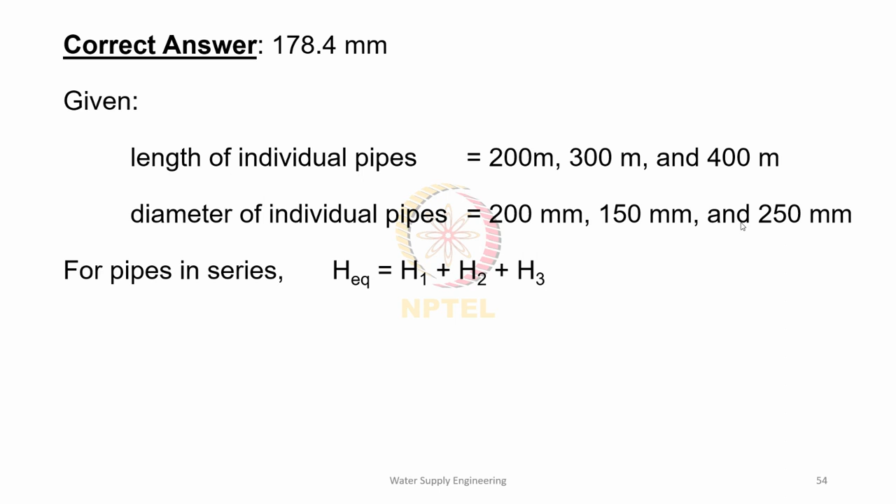So we'll see how to solve the problem. The correct answer is 178.4 mm. We are given that length of individual pipes is 200 meter, 300 meter, and 400 meter, and their diameters are 200, 150, and 250 mm respectively. When the pipes are in series, head loss will be the sum of the head loss in each of them, and discharge will be equal in all when the pipes are connected in series. That is, H equivalent equals H1 plus H2 plus H3, and Q equivalent equals Q1 equals Q2 equals Q3.

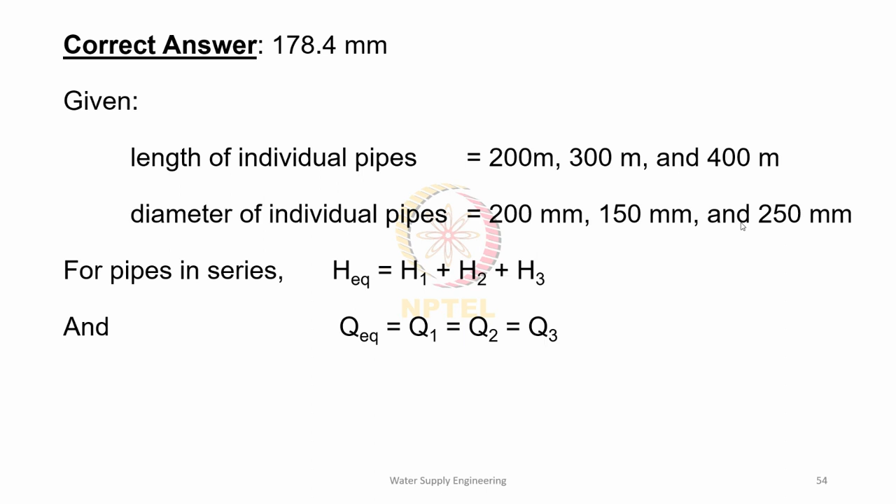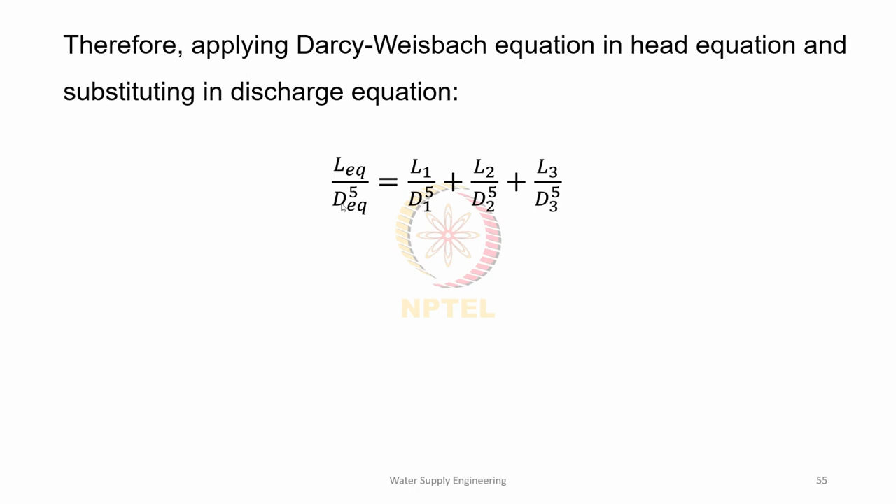Considering the Darcy-Weisbach equation and applying that in the head loss equation where H equivalent equals H1 plus H2 plus H3, and resubstituting in Q, we get this form: L equivalent by D equivalent raised to 5 equals L1 by D1 raised to 5 plus L2 by D2 raised to 5 plus L3 by D3 raised to 5. All other terms get cancelled, so here only unknown is D equivalent. Substituting all other values, D equivalent can be solved as 178.37 mm. Hope that is clear.